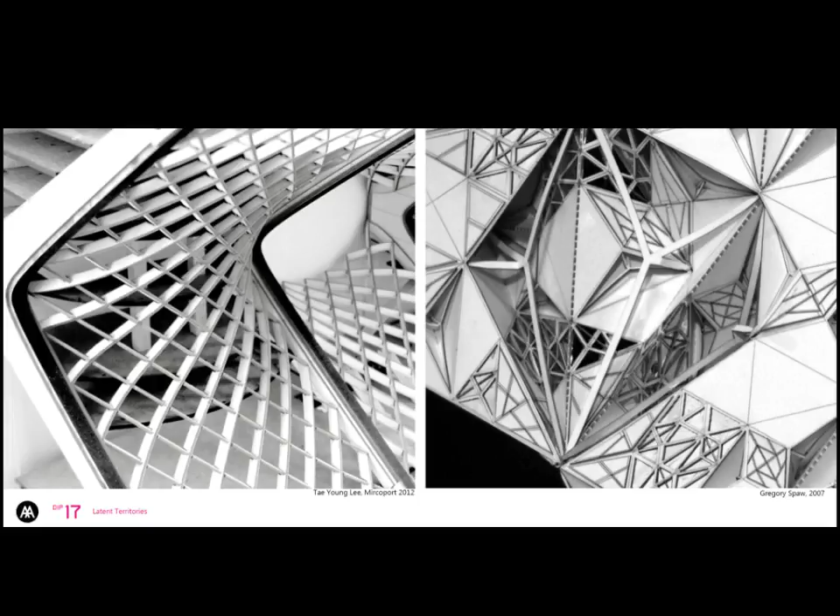Now, our current research focuses on the role of form within spaces of knowledge exchange in the age of digital content, and most importantly, outside of institutional boundaries. So, how do we exchange knowledge outside of libraries with dematerialized content?

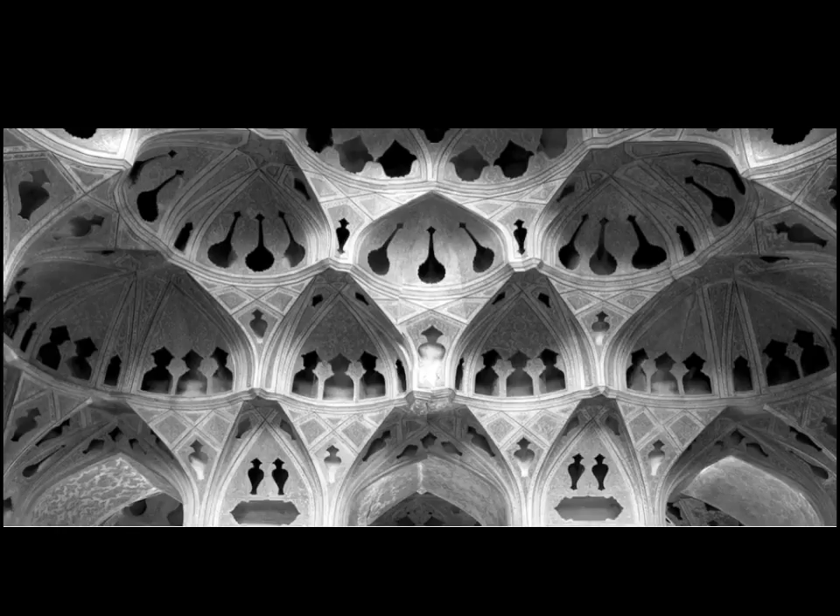And we're particularly interested in the idea of producing architectural form and tectonic systems that integrate multiple design objectives, such as this example where structure, acoustics, the spatial experience, and probably religious coding are integrated into one form. So instead of using separate architectural elements to fulfill different functions, with one form we can integrate all of that. And we can develop that with a computer nowadays.

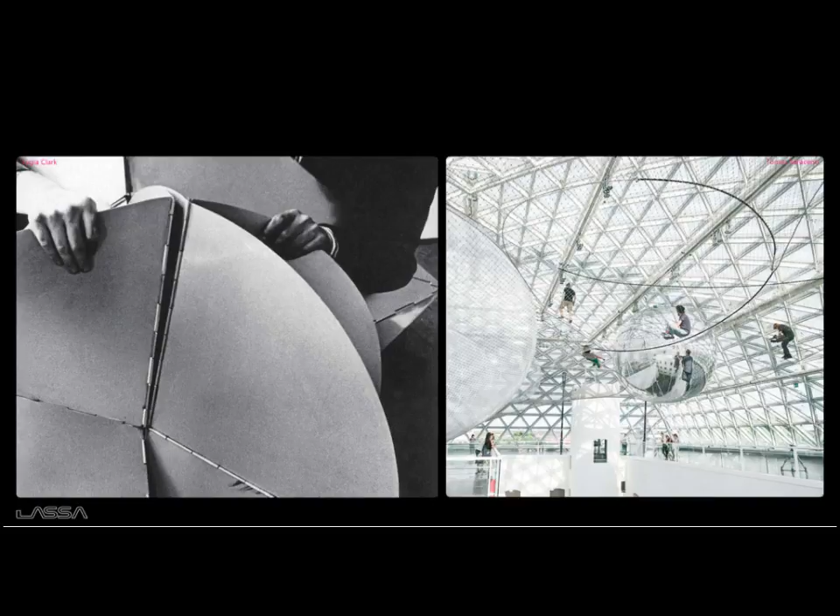We're also very much interested in the performative aspects of form and their capacity to materialize relational spaces, and more particularly repositioning the body in society through action and the triggering of senses. So we're very much interested in participative art, such as Lygia Clark and some of the installations that we use as inspiration for our projects.

And today I'm going to present two projects of our Brussels studio. I will start with a small nursery that we're currently prototyping and about to construct here in Brussels. And what's interesting about those 2 projects is that we had been involved in the past in designing our projects in 3D and having them manufactured digitally, like file to production, by shipyards and aerospace companies or the car industry.

But now, what's particularly interesting with those projects is that we are able to design and construct buildings in our basement. So it's basically desktop manufacturing, but not at the scale of small laser cut models, but actual usable buildings. And the interesting thing about that is that, because we have managed to survive a series of important constraints such as cost, we are also able to gain a lot more creativity that our profession is lacking sometimes because of budgets and other restrictions that we have.

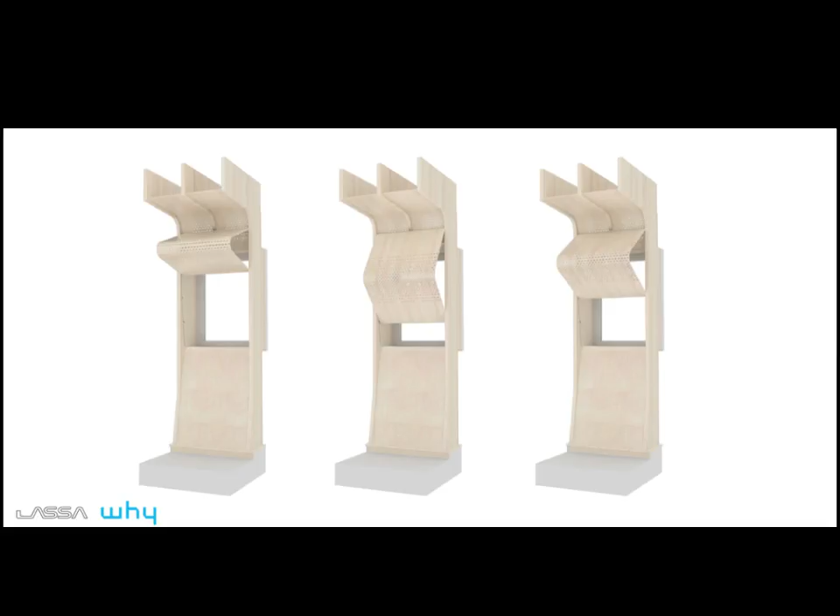So the first project I'm going to show you is a collaboration with WHY Architects, Yannick Deneyer, that you can meet later as well. And we were invited basically to develop a small prototype for a nursery. It's basically a classroom that we would have to design and manufacture in-house and self-construct. And we had only the thickness of the wall to basically be creative. The outside envelope was constrained by a building permit, and the inside area was constrained by ONE, and so that gave birth to a series of interesting creative possibilities.

We developed the project like a Swiss knife, so basically the structure of the building is also furniture, so it contains function, and we were able to integrate all sorts of interactive parts, such as this window with the shutters, but we also had libraries, tables popping out of the wall, and this is a visualization of how it could be, also when things are closed. So the idea was also that the children could interact with the building.

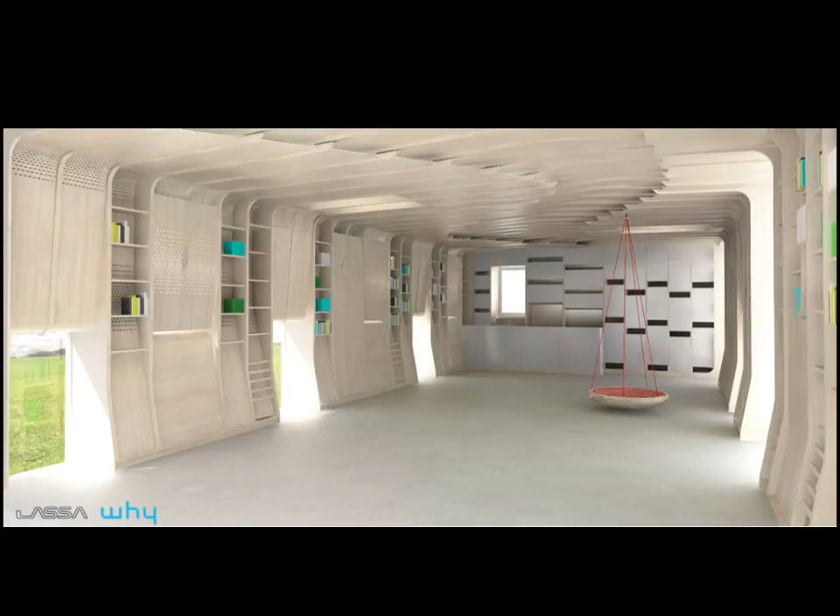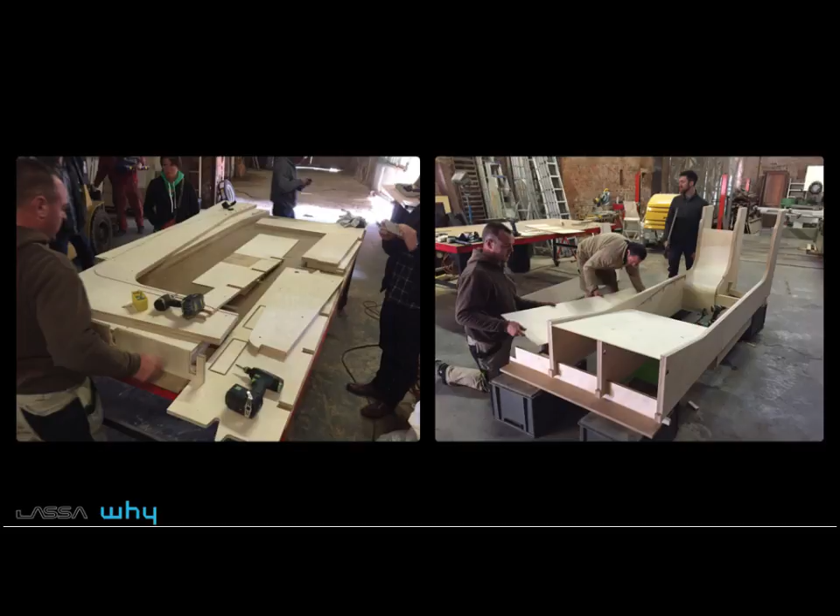The functions integrated in the wall were ranging from storage to educational functions such as climbing, but also other functions of the daily routine of eating and reading and playing and so forth. So basically, we cut a mock-up in our studio, and we assembled it ourselves with the help of a contractor as well.

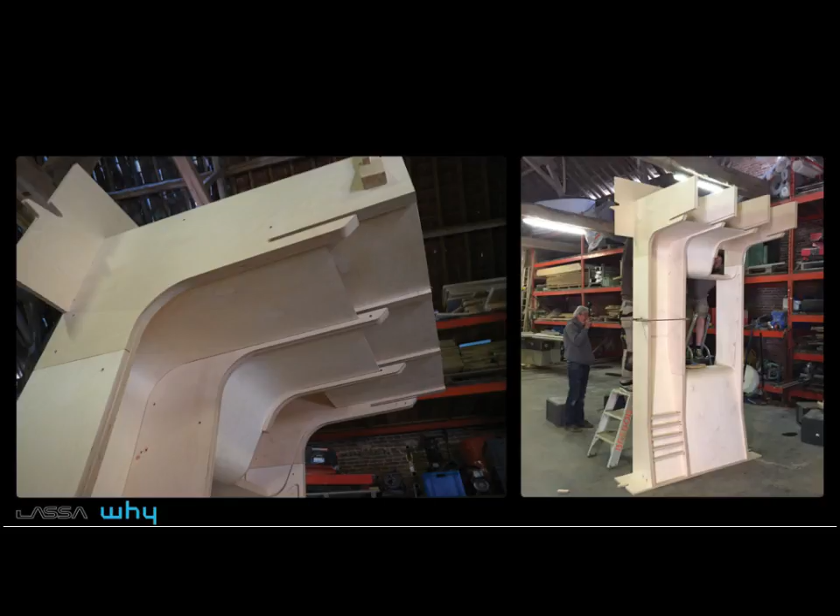Basically, we assembled this in 45 minutes, by figuring out all sorts of problems, all sorts of constraints, and we figured that we could probably pre-assemble the whole nursery in 4 days and assemble it in 1 day on site. So you can see here the cutting, then the pre-assembly, 45 minutes for each shelf. Then everything gets transported and then plugged into place.

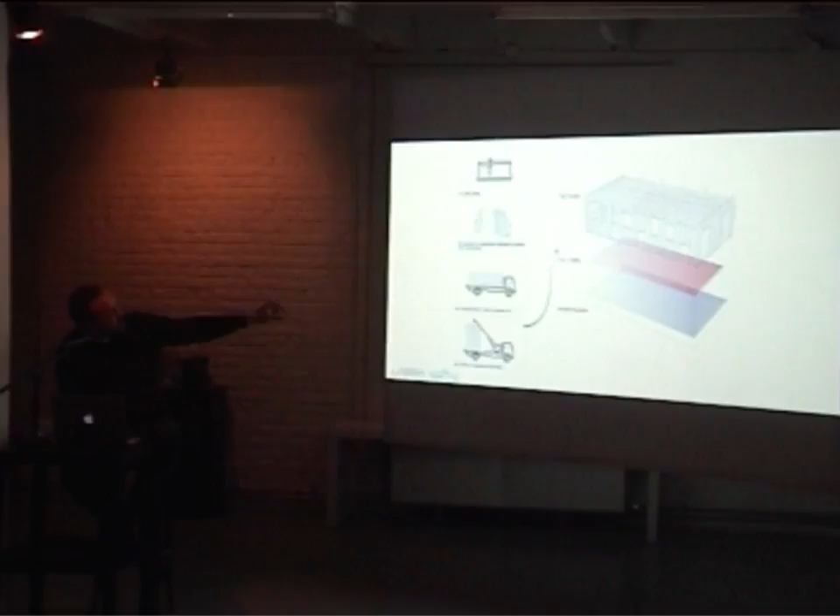The second project I'm going to show you is a project in Greece. It's located in the southern tip of Peloponnese. And we were able to explore this idea of form integration in this project, and form as a negotiated form. The constraints we worked with were primarily, basically, we were located on a hillside in an olive tree

field, and the client requested that the house would frame this particular island and the village, which were not visible from the ground. Because of the olive trees that were planted according to the slope, the views were not framed. And so the role of the building was to reorganize viewing, both panoramic viewing and close-up viewing, in a

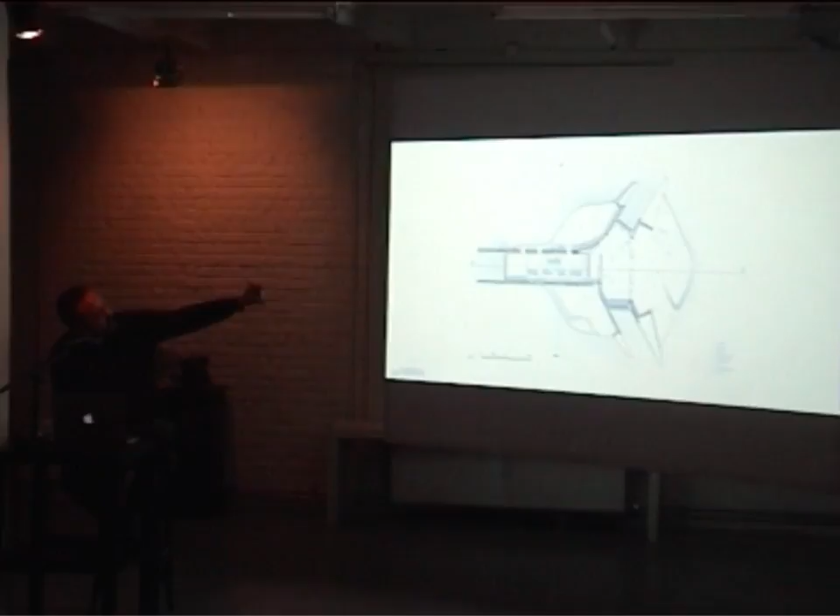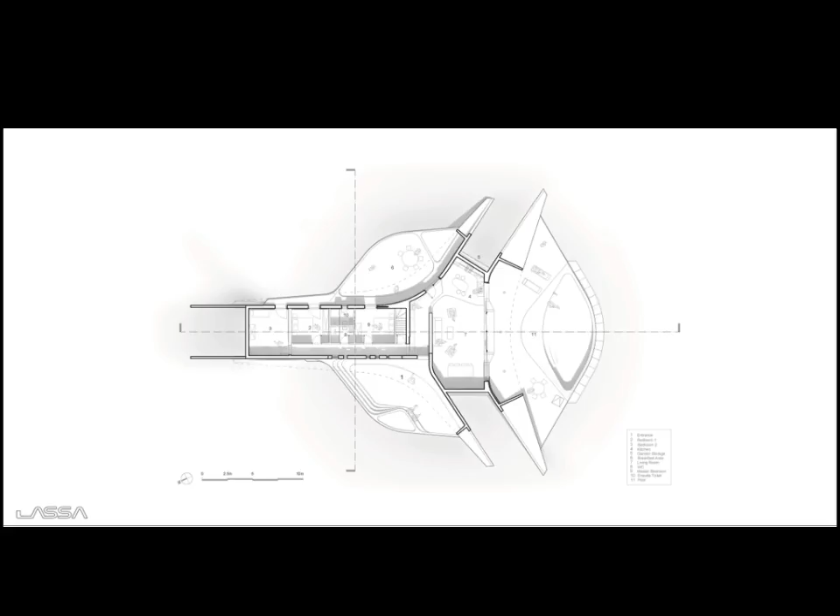As you can see it here, movement is continuous. You can enter the house, come out, go up the roof, go down. And basically, the form of the building performs several purposes. One is to extend the landscape, just barely going at the height of the olive trees and dipping down again. By doing that, we're producing the 3 courtyards, and the extension of each cantilever of the shell is basically calculated according to how much sun we want in each courtyard.

So basically, as you can see, with some simulation we did, we were able to organize the daily routines of the house according to lighting. So, for instance, the west courtyard would be in the shade in the morning. We would have breakfast. The east courtyard would be in the shade around noon. We would have lunch, and so forth. So basically, the activity would actually revolve around those courtyards and over the roof.

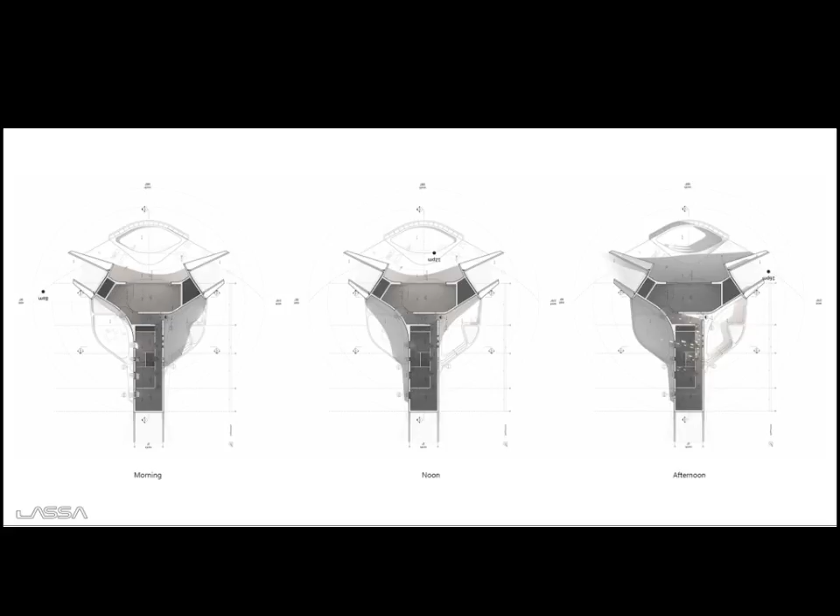And so the sleeping rooms which are there are just used for going to sleep at night. But basically the outside and the landscape is very much part of the experience of that house. We also calculated the shell so that it provides shading. Basically the light doesn't touch the large opening so that it remains cool during the summer, whereas in the winter, light would penetrate very deeply inside the living room and heat up the space. So all these things were possible to calibrate because of software simulation.

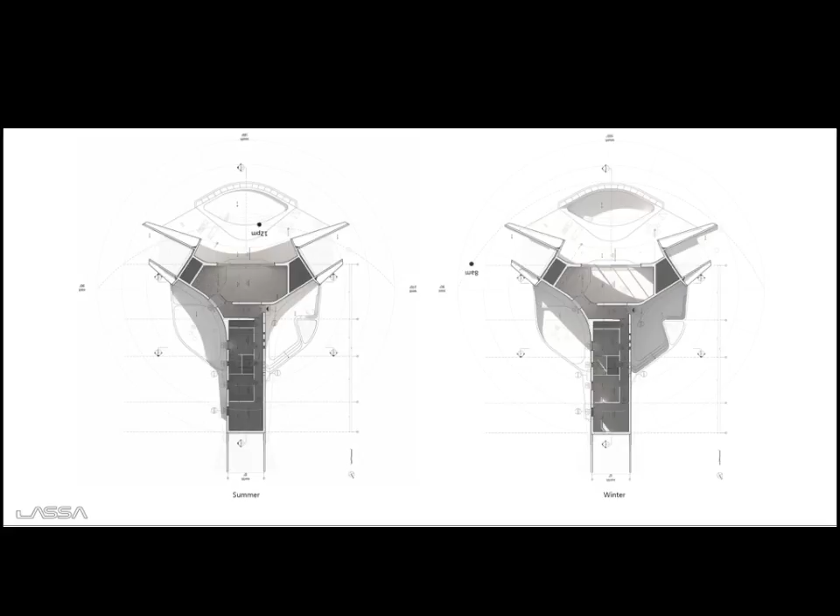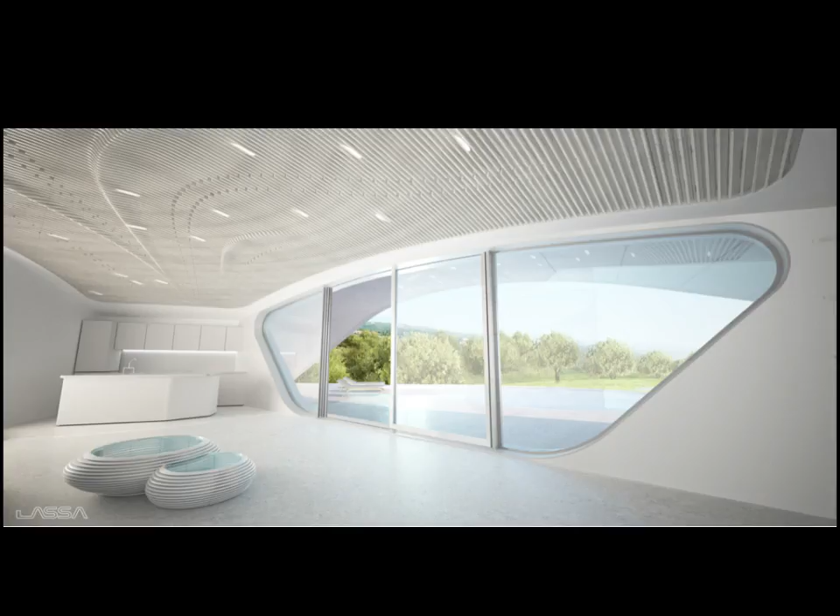So one of the big questions about this project was, how can we realize this project in a place where the construction industry is not very sophisticated? The budget is fairly low. For your information, the construction cost in Greece is not much lower than in Belgium. So basically, the main challenge we were facing was how to build this concrete shell, how we could form the shell. And so we looked into different techniques.

This is a project I worked on in Ireland, where we basically used CNC milling of large polystyrene blocks. So basically, we designed everything in 3D. We sculpted foam, we sprayed polyurethane on it, and then we poured this sculptural bridge on top, which was a very, very efficient technique and also quite cost-effective compared to steel structures that would have been 20% more expensive. So we tried that. That was too expensive still.

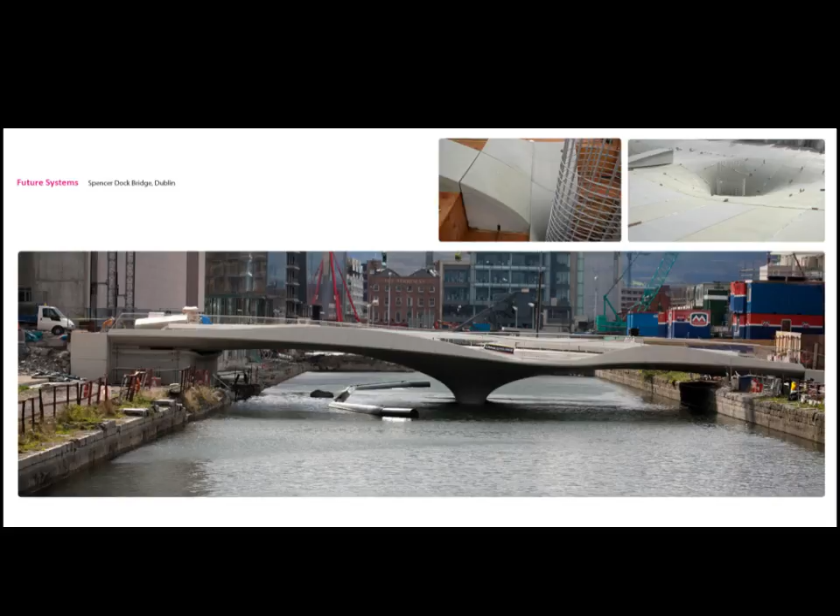So we said, okay, how much does it cost? It's a third of the budget. How much does the CNC machine cost? How much wood do we need? How much time are we going to work on this? And then we said, okay, let's move our studio and let's buy a machine and let's do it ourselves. That way we can also do the furniture. We could do all sorts of other things, the landscape. We're never going to be able to build this project with that budget if we don't buy the machine. So we started with very small-scale laser cutting tests.

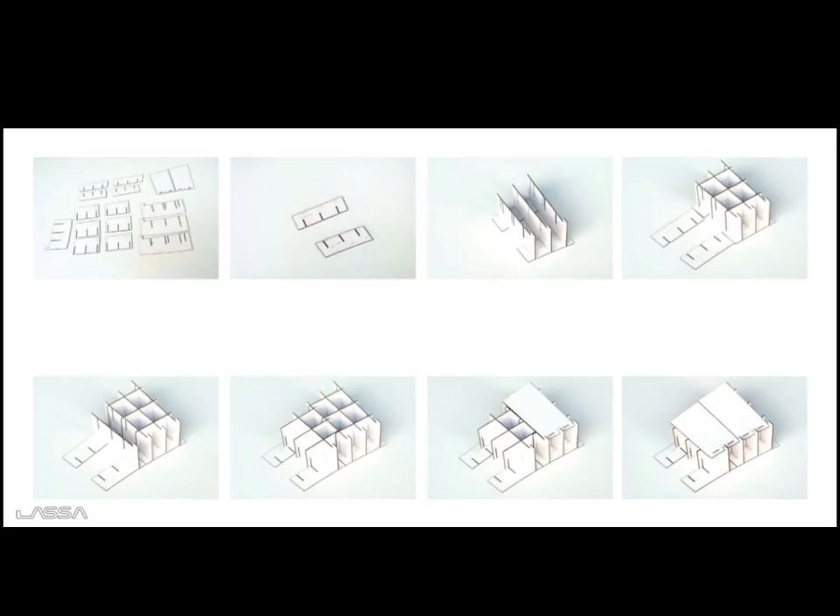One of the constraints we had is we had to ship to Greece about 5,000 parts of a puzzle that we would need to assemble quite fast. We were not builders in the office, we're architects. We use computers most of the time. And so we basically looked at Chinese temples that are basically made out of connections without screws. And so we developed a system, geometrical system, where we could assemble 5,000 parts without making mistakes and without wasting time screwing, which is a huge relief for the team.

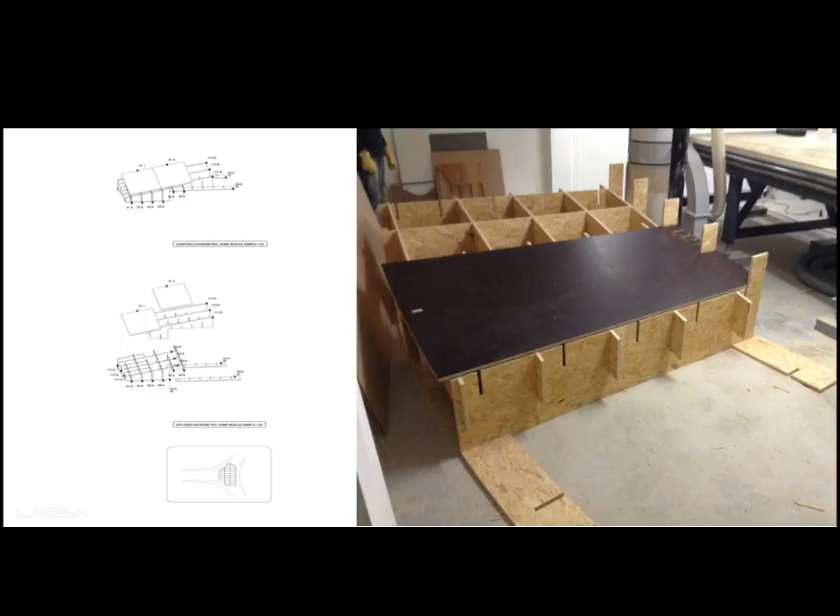By this point, our engineer dropped us, so we said it doesn't matter. We'll make a one-to-one test in the basement, and we realized it was overstable. So we hired another engineer to basically save some wood. So this took about 10 minutes to assemble downstairs. And so we also gained confidence about our ability to basically produce the formwork ourselves, which we're not very used to. I mean, all of us had used laser cutters in school and with the students, or designed stuff that is produced or laser cut by others, but this time it was us.

So, and because we're a bit lazy, we said, okay, let's try to put all the intelligence in the 3D and the geometry, and also limit the amount of mistakes. A second part of the formwork was the double curved part. The one I showed you before is planar and is fairly straightforward. The other one is double curved. So we had to look at a series of strategies of how to produce the curve, but at the same time, instead of throwing the formwork away, keeping the formwork to perform something else.

And we felt that in the living room, where we have double curvature, there might be a problem of echo. So basically, this structural system, which is a mock-up, also a prototype we did in the studio, would give us acoustic performance somehow. So here you can see all the carcass, all the different layers.

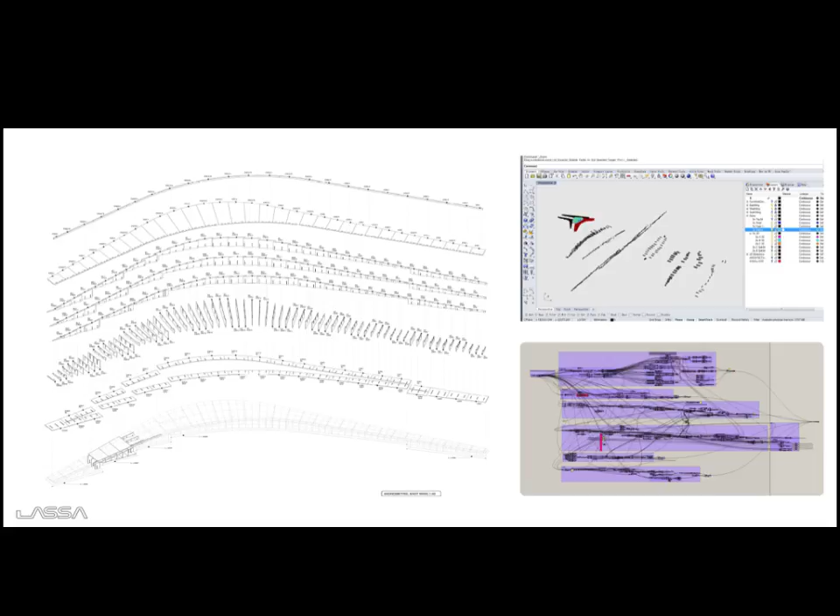Then came a moment where we knew what the project was, and we basically scripted all the production of the parts. So we didn't draw every fin one by one. We wrote a script using Rhino and Grasshopper, where basically all the cutting, all the production of the geometry, all the assembly, the unrolling, and even the numbering was done by this guy. It's a script that takes about a month to write, but I can tell you that it saves months of cumbersome labor.

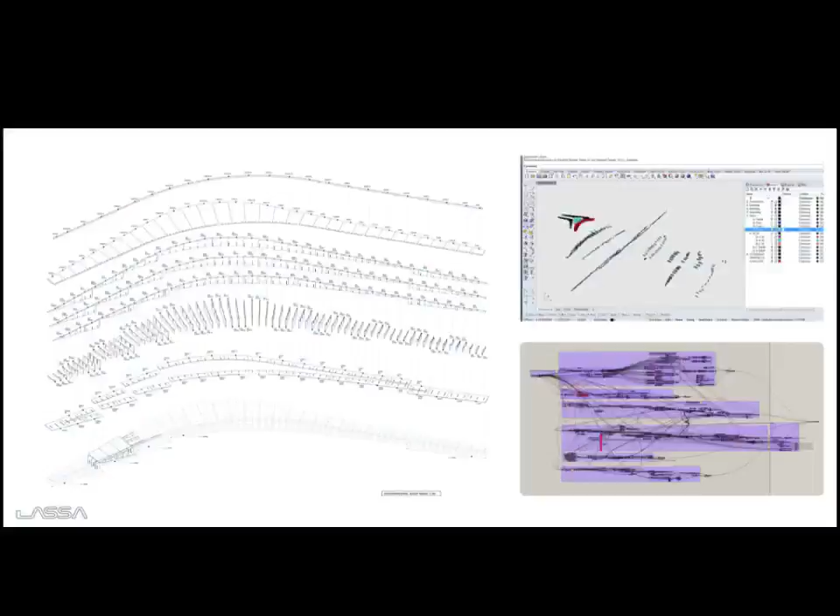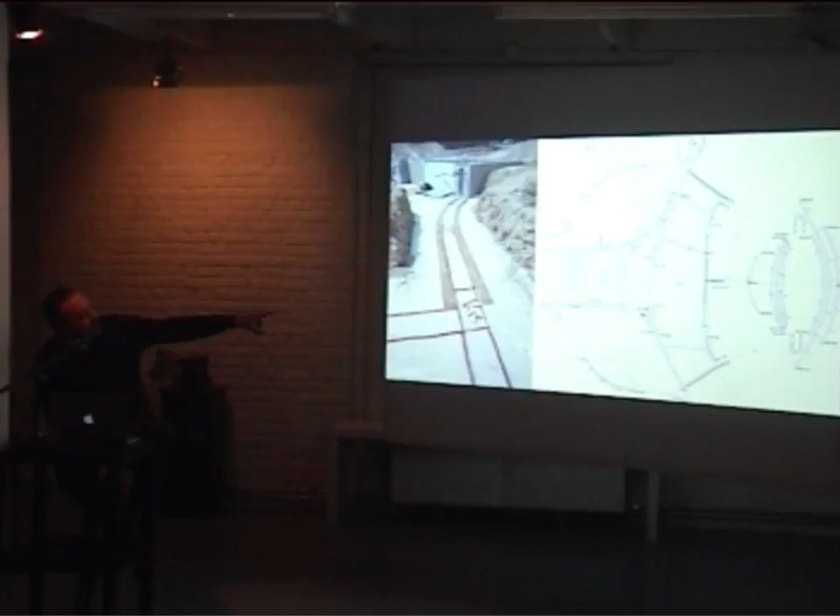We had to build all sorts of parts. Although we were only producing the formwork for the ceiling, we had to produce a series of parts on the ground, which are those red parts, so that we could design the whole geometry of the building without the use of a surveyor. So basically everything is clipped like a puzzle. Everything is numbered. There's just one insertion point for all of that. It's put together by us in a day. And then everything is very straightforward for the contractor. Also, it would enable us two levels up to fit our formwork between the walls and have no tolerance problem.

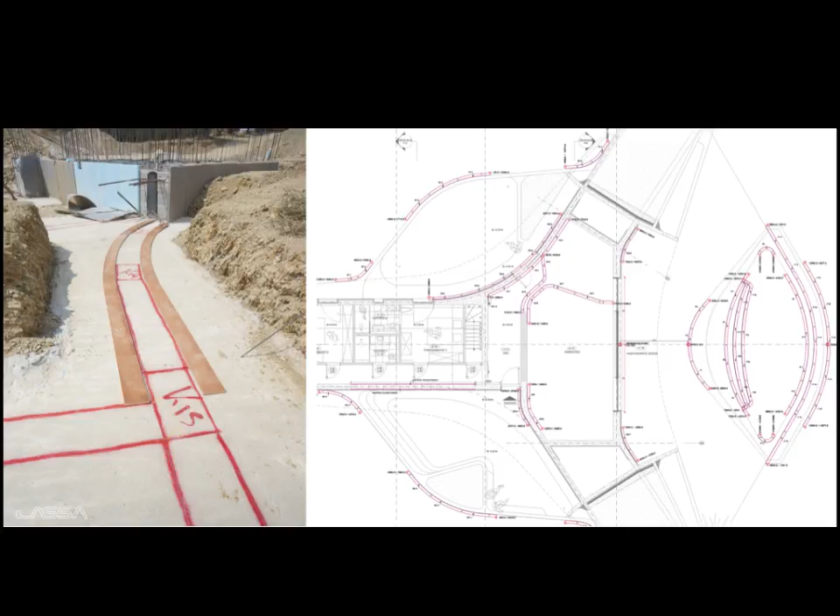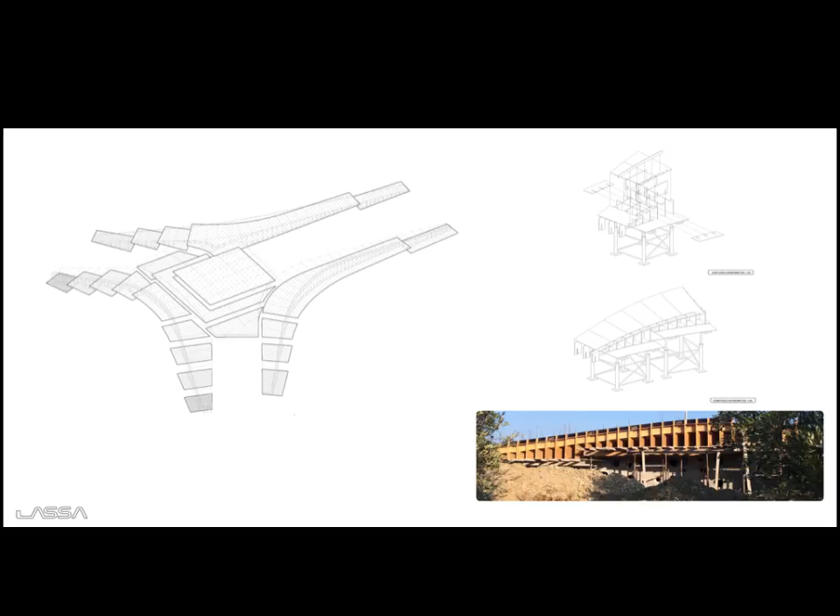So the strategy we chose was to ask the local contractor to produce a series of tables, which are there, and then we would place our formwork on top. These are the levels, so it's very, very simple to produce for anybody. It doesn't require specific knowledge of geometry to do that. This is 2 days of work, 4 people. It's actually much faster to assemble than IKEA furniture, because all of these parts slot very easily. The funny thing is, and I wouldn't have expected that, is it took much longer to produce the tables than to install our part.

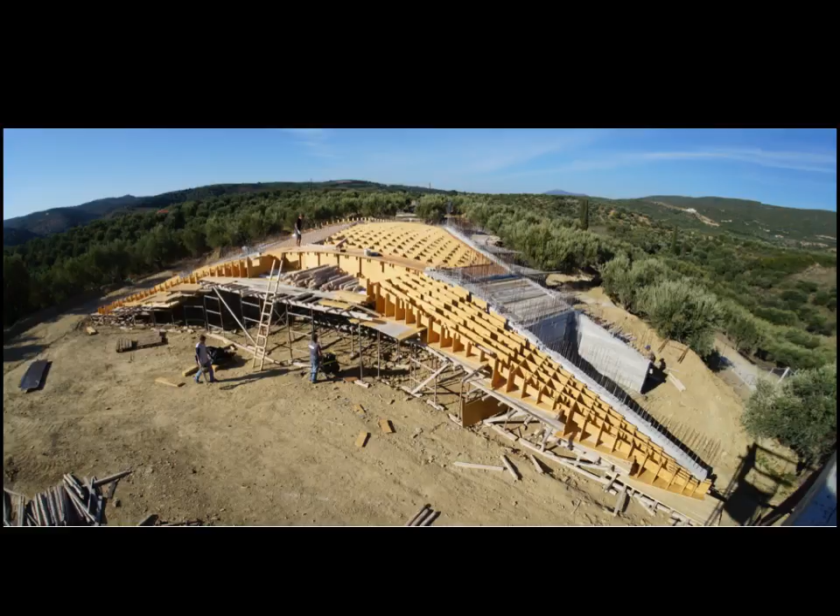Actually, we moved to Greece for 4 months with part of the office. We had a server. We brought an A3 printer, which we never used. It was a totally paperless construction site. And we were starting work with the guys at 7 o'clock, and at noon we were on the beach fishing, or I don't know, having drinks. So it's part-time, 4 days. So here you can see all the tables.

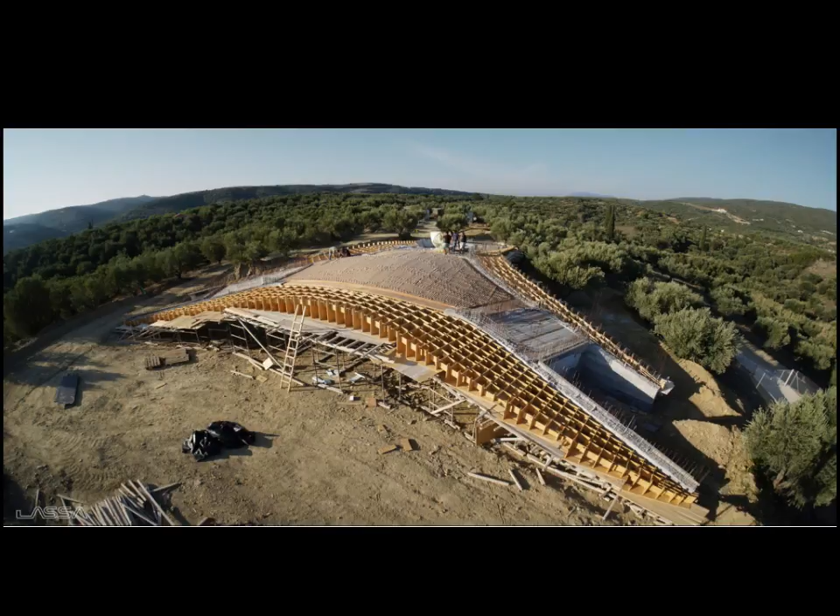This is the double curved part of the living room, where you can see the supporting structure for those fins that you saw in the rendering. This is the formwork, which is there, and the little elements that pop out are the dowels. Basically, they're attached to the concrete, basically, the rebar.

So all of this was also scripted. There's a series of panels that are super thin. They're just 6 millimeters. Like this whole part could cost something like 600 euros. So 6 millimeter top shell, which was just plugged.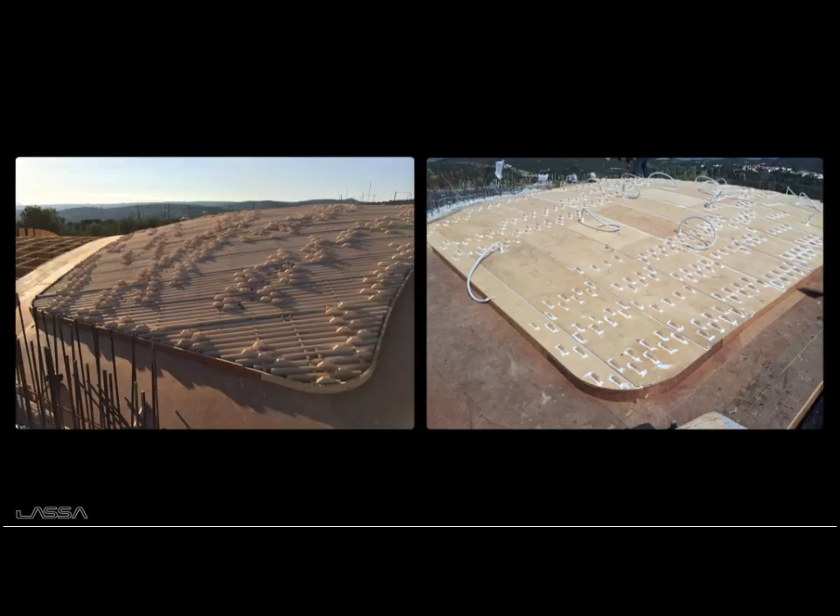Everything was pre-drilled. And then, as you can see, the cables, the electricity was already there. I mean, we just had pre-drilled the electricity, so we could insert some lighting. And all of that part in the center basically was going to remain after we take the formwork out. So it would stay on the ceiling and be an integral part of the building.

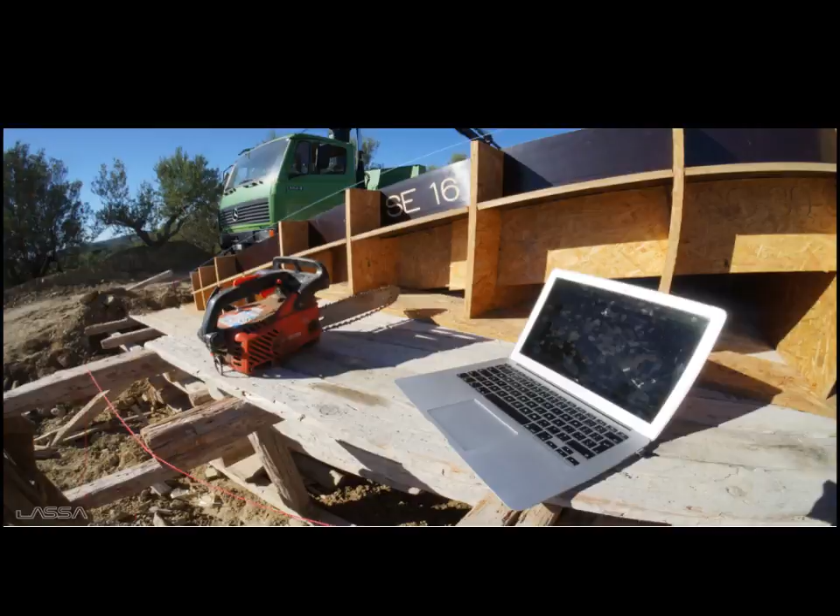So these are the tools we used for our site. We used the chainsaw twice when we basically lost one part out of 5,000. Basically, we cut one piece twice, and we had to cut it by hand again. The other one was to cut the tables from the contractor, basically, because the tables were interfering with the formwork. As you can see, also they are numbered.

So this is southeast panel 16. It's all very straightforward. But there's no manual, no drawings required. We designed it very intuitively. So at this stage, the formwork is almost ready for pouring the concrete. So basically, we're making a giant mold. These parts, the black parts, are exposed concrete. The other part there is the wood that's going to remain the ceiling.

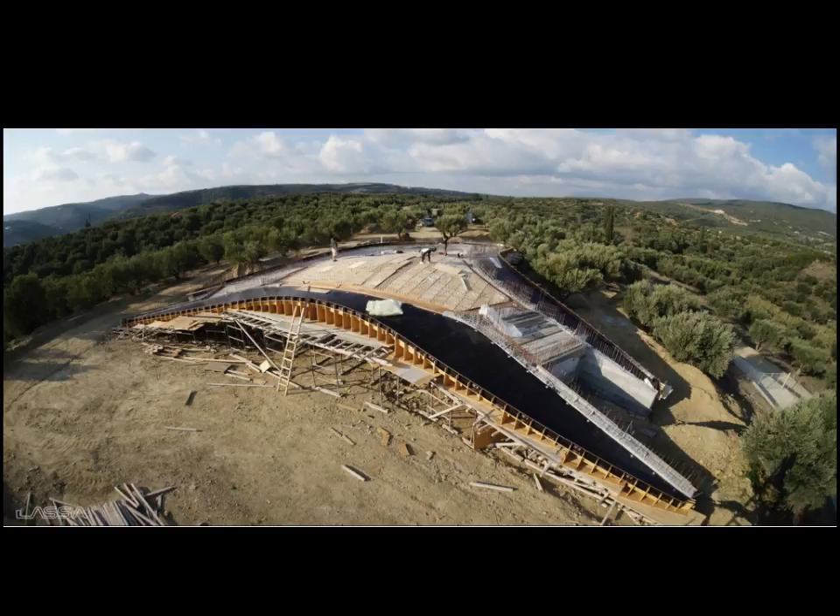We used a series of techniques from the shipping industry or skate parks, to produce those tighter curvatures with a numerically controlled hot wire cutter.

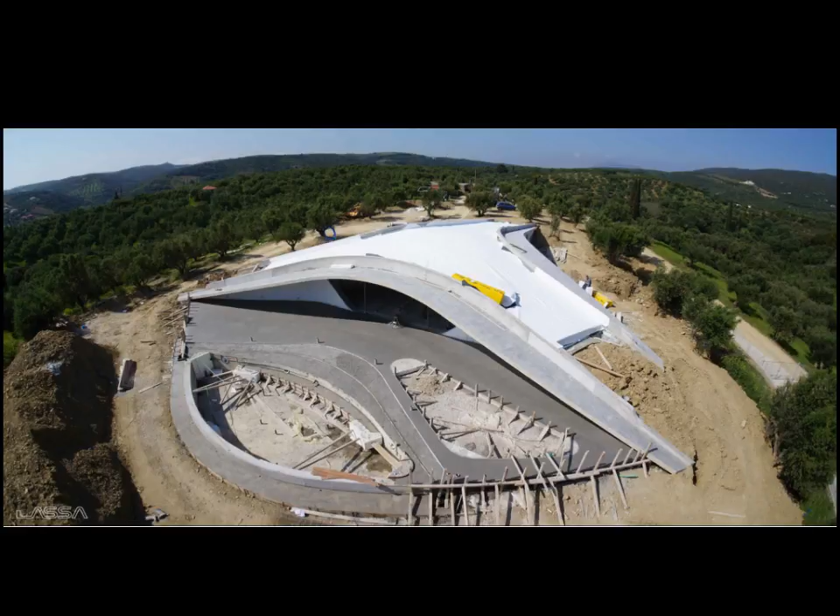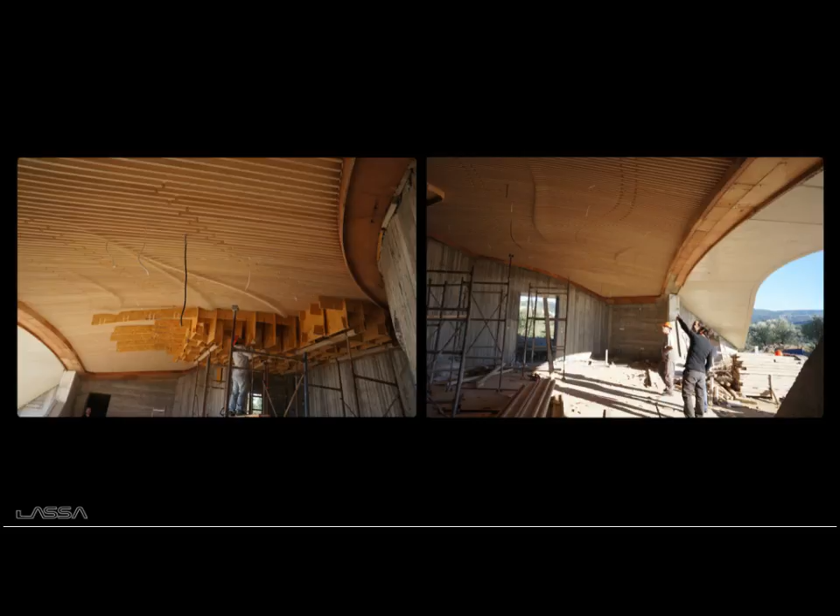Yeah, and so that was a view of the house after the demolding. The formwork, the OSB parts are false work, so they are to be detached, and the ribs that you see in the background are the actual formwork that's staying on the ceiling. As you can see there, we are detaching the false work, and what's exposed is the ceiling. You can see it there.

Actually, the design of the seams, which looked like dunes, came out of a constraint as well. I mean, we used all sorts of constraints in a creative way in this project. That was used to minimize the amount of wood. The panels that we buy in the market are 2.40 meters. That means we would have had a line on the project, some kind of grid on this, and that would have been a real pity. So we said by curving this, then we can have smaller panels, and therefore we can put more

fins in one panel. So all of you who are familiar with laser cutting, it's something that's quite handy. So we also used all sorts of software to nest, so basically to position the panels in order to save material before it's cut numerically. So we were just feeding the machine like we feed a printer with paper, and the machine was cutting, and then we're just stacking into piles, and then everything was numbered. So we weren't looking for parts.

It was quite intuitive. So this is the demolding. You can see the exposed concrete. That was the black plywood, and that's what's remaining. This is the view of the island. That's the framing.

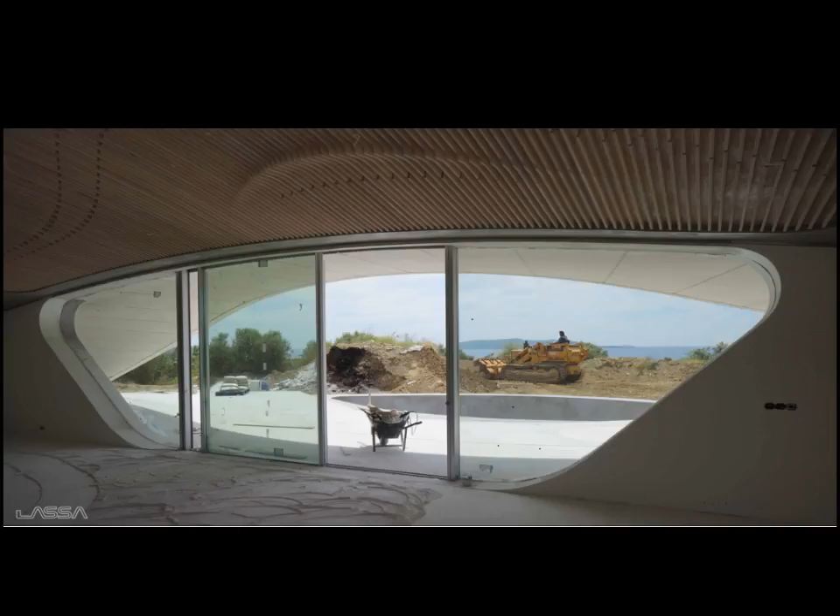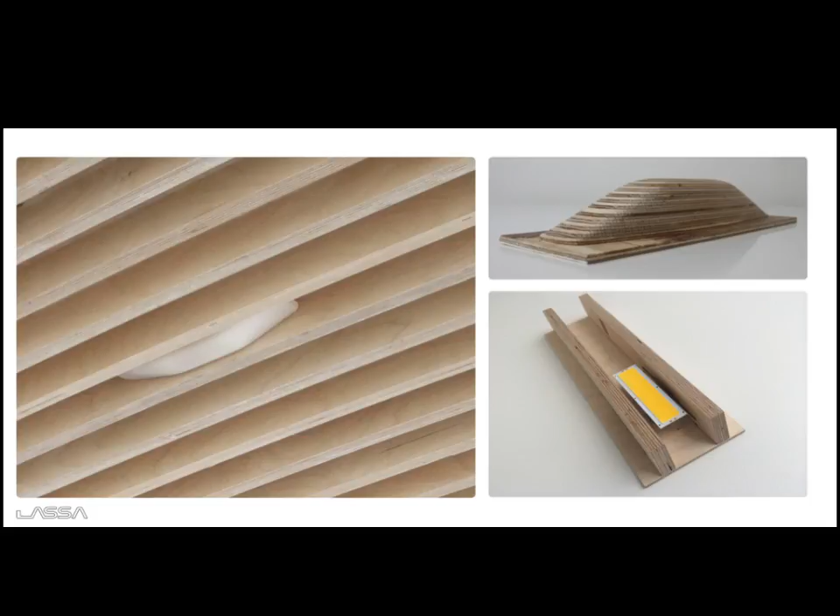And we developed all sorts of other patents for the project, like we thermoformed, so we designed a mold and thermoformed these lighting fixtures. We bought a series of LED panels in Shenzhen, in some kind of electronics mall, and we designed this small detail in-house and populated the ceiling with those little lights that we can modulate.

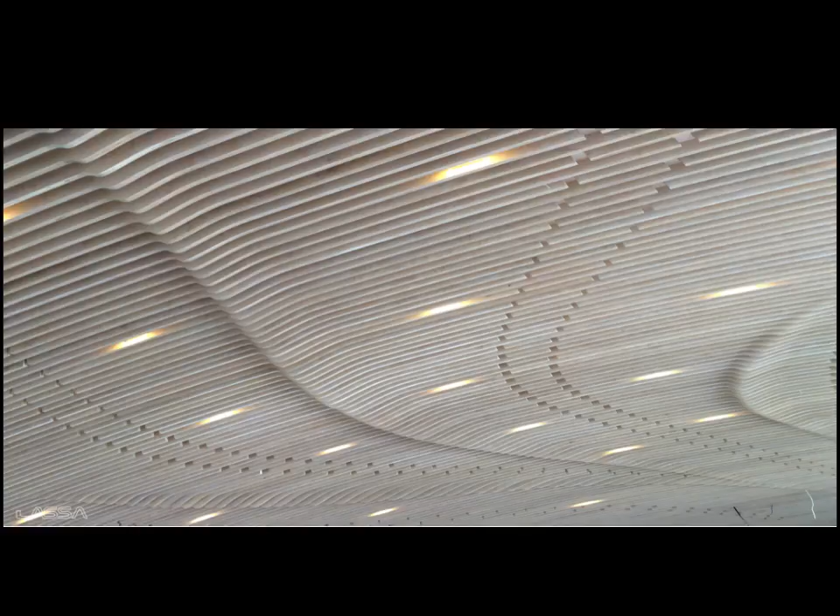So that's also not a very expensive detail. It probably cost something like 60 euros. But because we have the machine and we can mill the mold, we can mold all sorts of forms out of plastic or other materials.

The house has a perforated facade, which is very exposed to direct sunlight, but also needs a little bit of defense from theft. So we use this pattern, which is made out of those polystyrene blocks, numerically cut with hot wire. We have 3 scales, and they're all placed according to our drawing. They perform as spacers for the concrete.

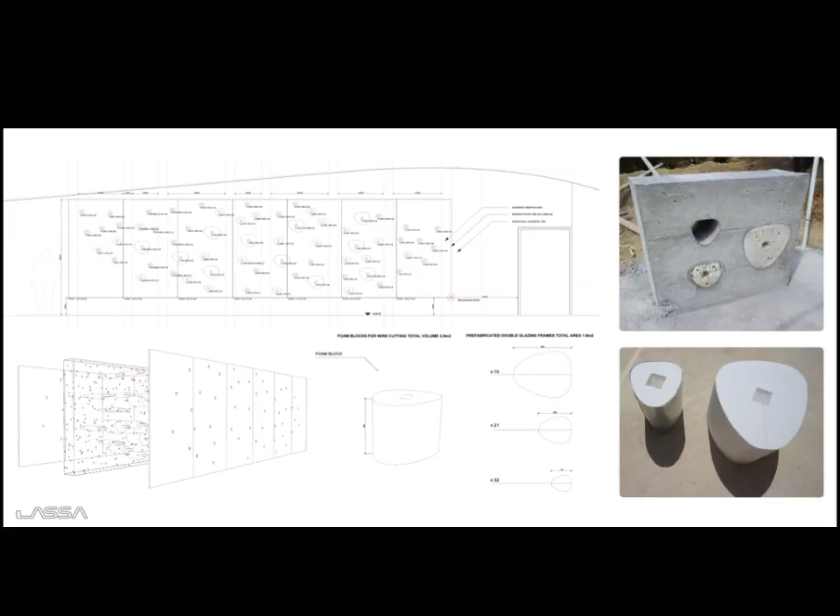If you know the work of Tadao Ando, there's a series of round circles, whereas here they would perform that role, so they also have a constructive role. We designed these molds also using the CNC and bent Corian to produce those frames for the windows. The glazing was water jet cut, so basically everything was done from our digital files. There was no measuring and redrawing by the construction company, which costs a lot of money.

A friend of ours accepted to laser cut a sheet of steel for the door to extend the pattern of the facade. We recuperated some of the cutouts to produce the handles of the door.

We were looking for a shower of that dimension. Actually, the ones that we found in the market were more expensive than this one. We designed, we sent our G code to a marble manufacturer, and they cut this shower that was basically flush with the floor. It was not some kind of ceramic piece that's added, but it's completely continuous with the ground. So it was also a lot more interesting conceptually. We designed all the furniture for the house, a series of tables and all the furniture basically.